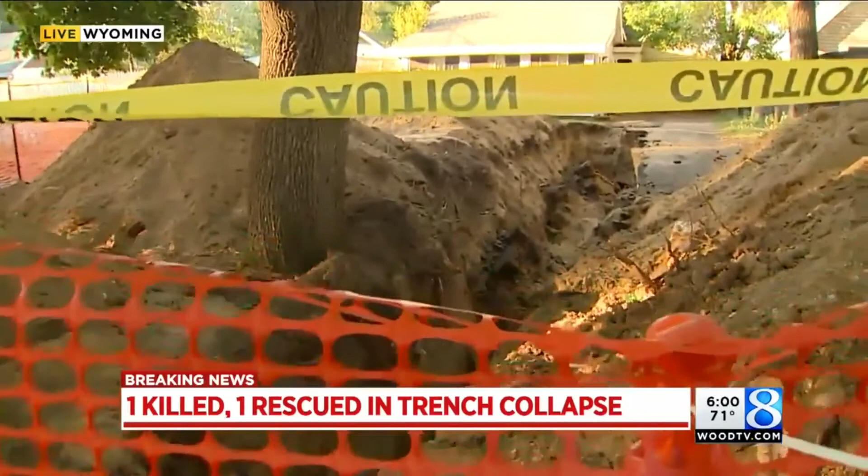And as you said, unfortunately for one of the victims here today, that rescue turned to a recovery effort. We are in front of the house on Jordan Street. I want to show you the conditions those two victims were working in. This is the trench they were digging to that home to replace the sewer line. As you can see, that trench is anywhere from 10 to 12 feet deep in some spots.

I was talking to some firefighters. They tell me that the rule of thumb is when you're digging a trench like this, anything that's going to put you more than waist high down should have some kind of reinforcement, some kind of plywood shoring in here. In fact, that wasn't the case. We talked to one witness who told me of the wall of dirt that came down on the two men.

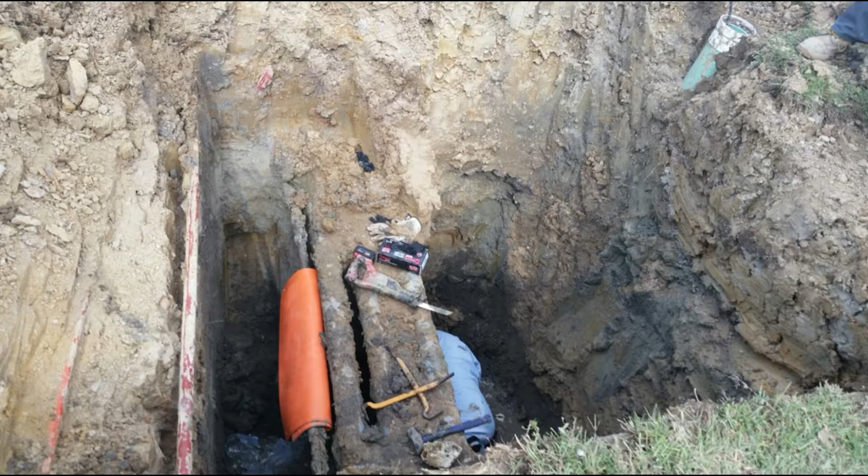Working at Aegion, you should hear the term life-saving rules quite often. But this isn't just a phrase or a catchy new initiative. These are rules that can have an impact to saving a life. Following these rules minimizes the risk involved with some of Aegion's most dangerous tasks.

Excavations and trenches are a major part of the job within the corrosion protection platform. And for this reason, the CPP has declared excavations as one of the life-saving rules. In this training, we'll dive in to ensure we all understand the hazards associated with excavations.

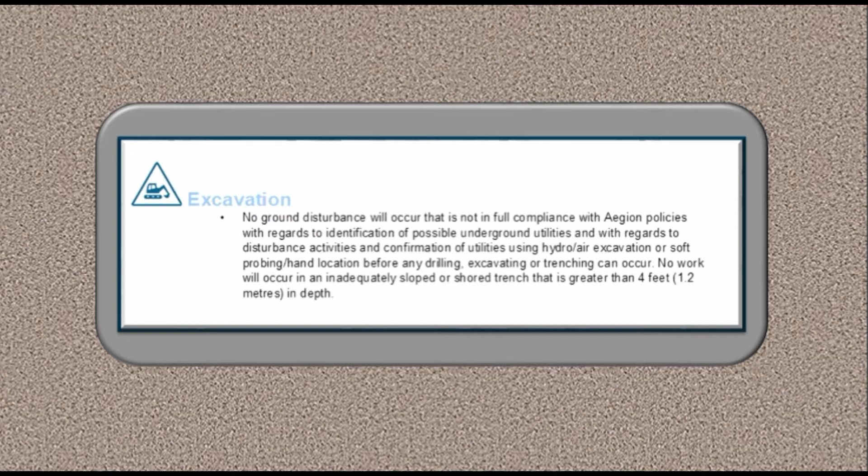Hi everyone, my name is Julian Arevalo, Safety Director for Corporate US. Today, we are going to talk about Aegion life-saving rule for safe excavation. Disturbing the ground and entering excavations is one of the most routine but high-risk activities that Aegion colleagues perform every day around the globe. It is also one of the activities where most people die or get seriously injured on the job. Excavation safety is very important for us.

During the next few minutes, we are going to discuss the details of Aegion's life-saving rule, which has two key primary elements: identifying properly any potential structure that is located on the excavation site and verifying their presence through probing or using hydro or air excavation. And the second element is not allowing anyone to enter an excavation unless it is properly sloped, benched, or protected by any means that is adequate for the type of soil conditions.

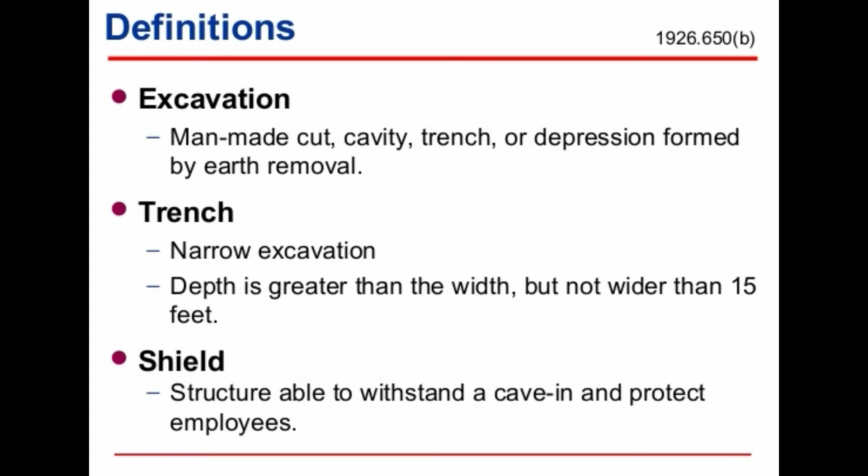Before we get started on the details, let's take a look at a few definitions for some of the material we're going to cover. An excavation is defined as any man-made cut, cavity, trench, or depression formed by earth removal. A trench is a type of excavation that has a depth greater than its width, but not greater than 15 feet wide. Shields are structures that are able to withstand the force of a cave-in and shield workers and equipment within. Shoring is a structure that supports the sides of a trench to protect and resist cave-ins.

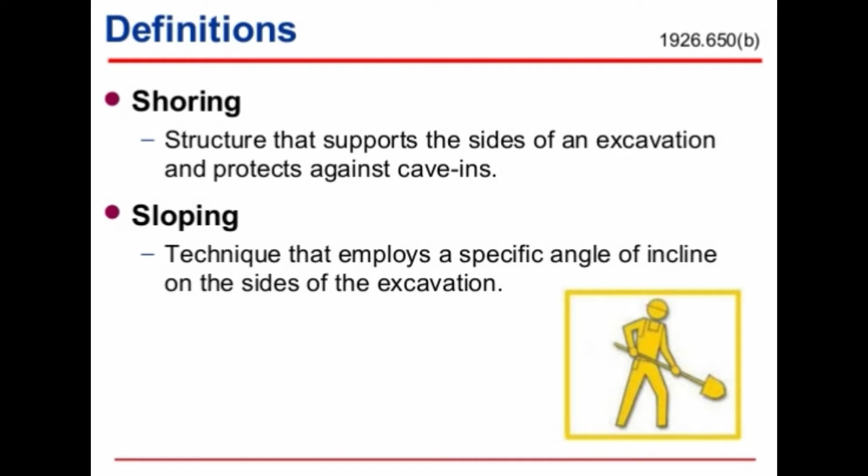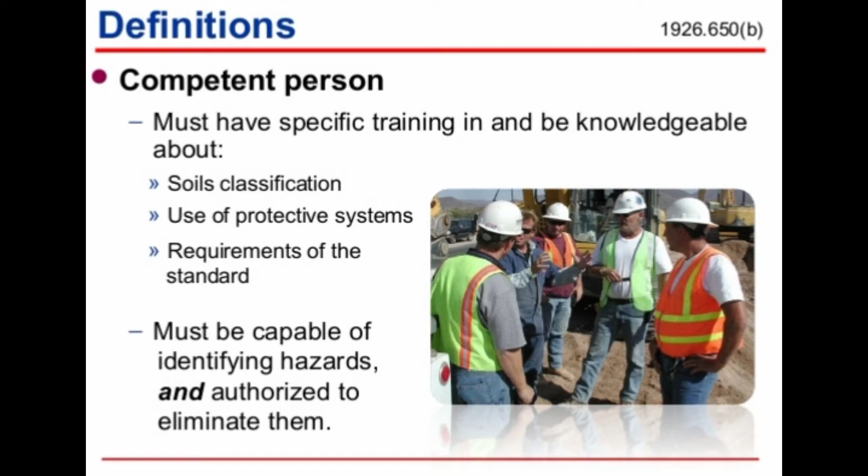Sloping refers to a technique that prevents cave-ins by sloping the sides of an excavation at an angle that greatly reduces or eliminates cave-in potential. The last definition is for the competent person. A competent person must have specific excavation training, be knowledgeable of soil classification, use of protective systems, and the requirements of excavation standards. A competent person must be able to identify excavation hazards and must have the authority to correct or eliminate these hazards.

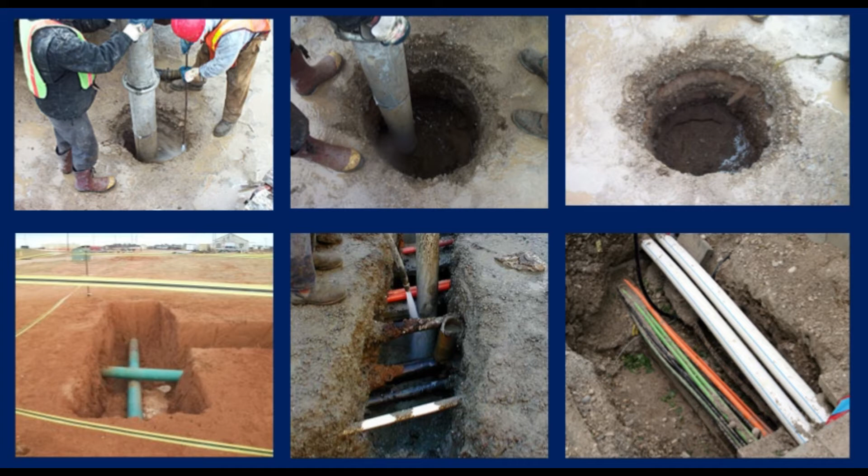Prior to removing soil and forming an excavation, we must have knowledge about what lies underneath. This could include various types of utilities, pipelines, or buried material. Most of this can be determined by completing a one-call prior to excavation. This is a requirement before any digging begins to allow for verification of underground utilities.

Hand probing and hydro-excavating are both methods to ensure lines and underground utilities aren't damaged or ruptured when digging. The force of a backhoe or excavator can easily damage any utilities that the bucket comes into contact with. By hydro-excavating, it's much safer to determine what lies beneath prior to digging with more aggressive earth-moving equipment.

Different types of soil require different guidelines for safe excavations. Hard, compact clay is much more stable than granular soil such as sand. Therefore, the characteristics of each type of soil allow us to determine which category the soil falls into based on how stable the soil is for excavation.

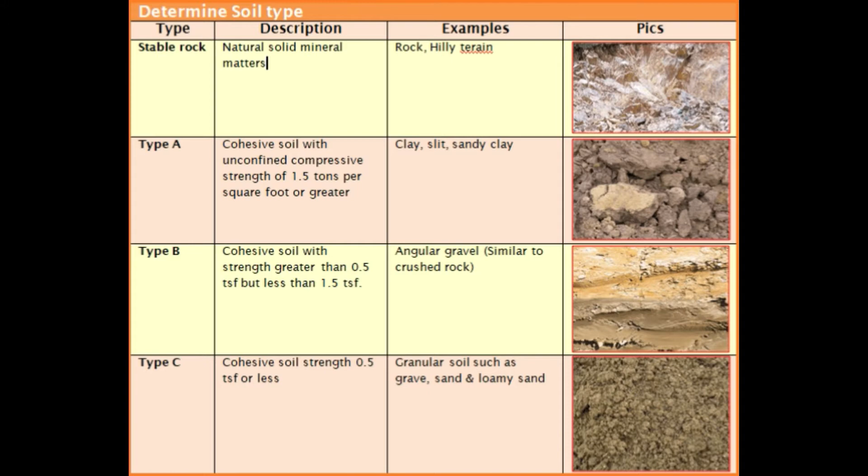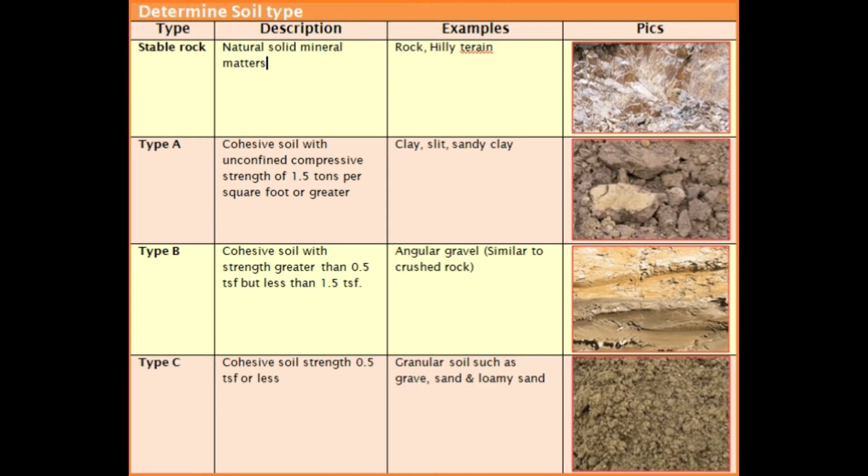Stable rock is classified as the most stable, followed by Class A soil, such as clay. Class B soil is less stable than Class A and requires greater sloping for safe excavation. Class C soil has very low cohesive strength, such as sand or loose gravel. This classification requires a much greater slope to be considered a safe excavation.

Looking at the table here, you can see the difference in sloping requirements for each classification. Stable rock allows for 90-degree walls, while width to height ratio of type A soil must be 3/4 to 1. Class B is 1 to 1, or a 45-degree slope, and Class C soil is 1.5 to 1. The instability of Class C soil makes it necessary to remove 1.5 feet of soil horizontally for every 1 foot of soil removed vertically, as depicted in the picture on the bottom right.

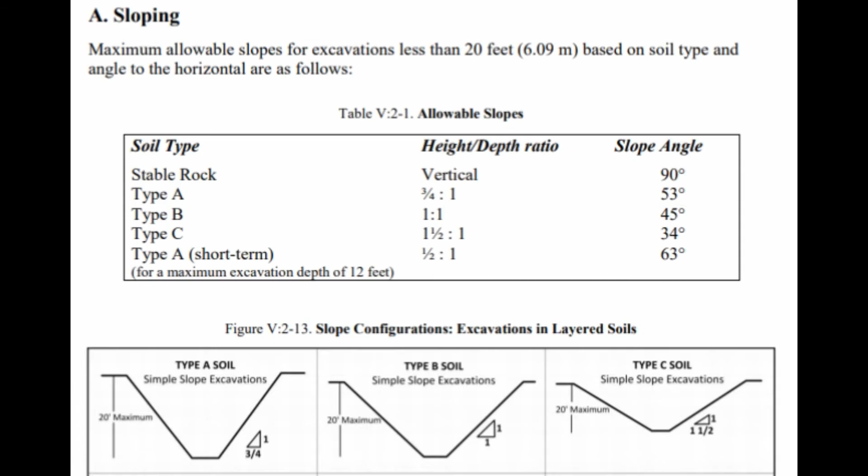It's important to note that these requirements are only valid for excavations less than 20 feet in depth. An excavation over the 20-foot mark must be designed by a qualified engineer. Type C soil is very common in our line of work. This picture shows the proper slope required for work in a Class C excavation. Again, the slope must be a minimum of 1.5 to 1, or 34-degree slope.

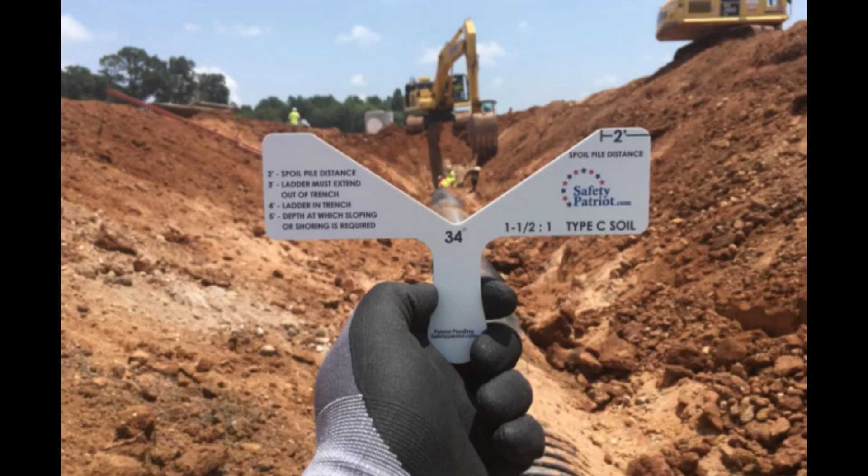Another method to reducing the risk of collapse is through shoring or shielding. Installation of a trench box requires much less soil removal than sloping or benching. When installed correctly, shielding and shoring provide adequate protection for workers that must enter excavations or trenches. However, to benefit from this protection, workers must stay within the confines of the shored or shielded area at all times. Access and egress must be made within this protective area as well.

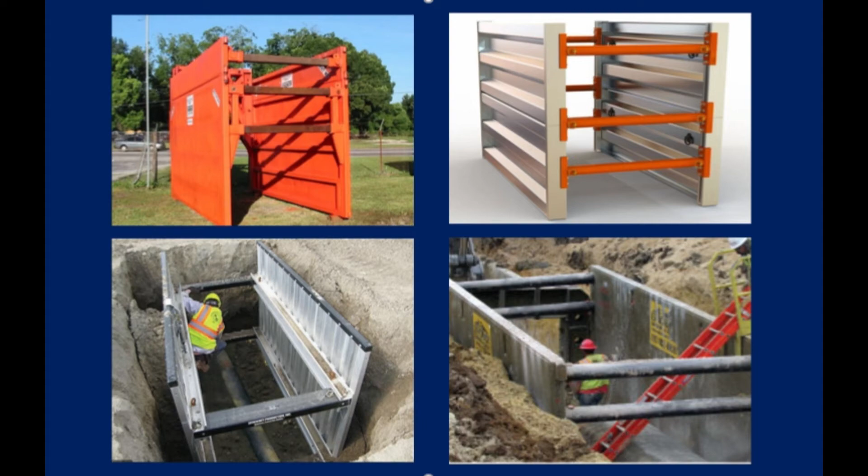When working in or around an excavation, it is important to know the signs of potential cave-ins or collapses. There are steps we can take to ensure the risk of cave-ins are reduced or properly mitigated. We spoke earlier about placement of the spoils pile at an adequate distance from the excavation lip or opening. However, vibration from heavy equipment can also play a factor when in close proximity. Ensure all equipment is an adequate distance from the excavation to reduce the amount of vibration the excavation is exposed to. Water, sheared excavation lips or walls, cracks, sloughing, and fissures are all signs that an excavation is at risk.

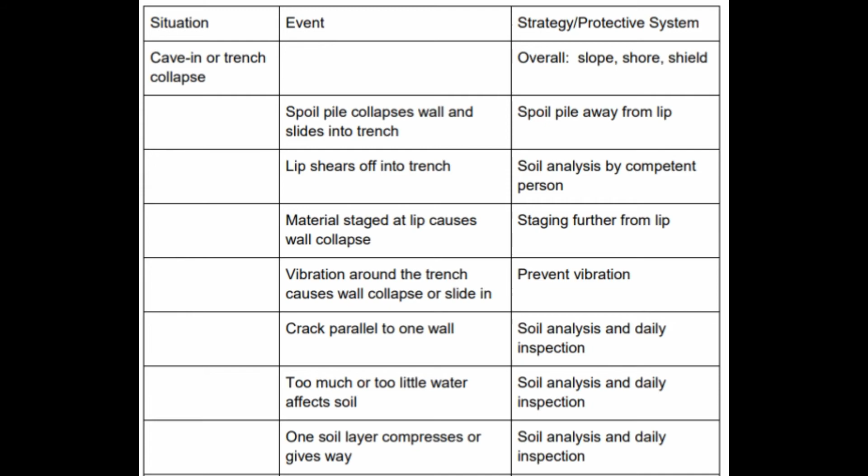Know what to look for and discuss any of the early signs that an excavation is at risk. The competent person will need to be responsible for analyzing the signs prior to entry and must be competent to know when and where excavations may be deteriorating. If you see something at risk, be vocal about it. We all have the obligation and responsibility to use our stop work authority when we suspect an unsafe act. This could include unnecessary risk, inadequate training or understanding, or dangerous conditions.

Each employee has the responsibility to stop and address any unsafe issues prior to proceeding. This is regardless of your position or length of time within the company. In fact, oftentimes, new employees with fresh eyes may notice unnecessary risks that other employees have grown complacent to. In any unsafe situation, it is imperative that we stop and reassess the task, priorities, and the safety of ourselves and coworkers. There will never be any retaliation for using your stop work authority. If you see something, say something.

Anytime there is a concern, it is better to address it earlier rather than later. Waiting can be too late and have severe consequences. If you have the thought or feeling that you should maybe stop work, then chances are that others have the same feeling. Once you have this in mind, it's time to address it right away. One step backwards to reassess the situation is often the quickest and safest way forward. Using the stop work authority is a step in our safety program that is admired, appreciated, and respected. We need to remember to use the tools we are given to elevate our safety culture. This is our path to be better and strive for zero incidents.